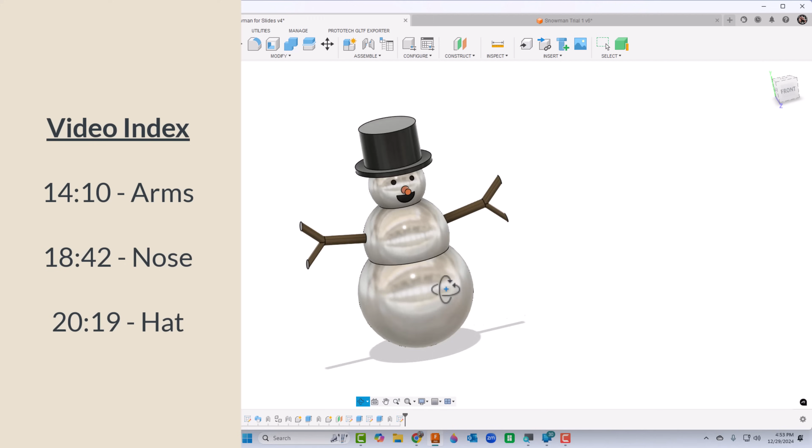In today's video, we're going to take a look at how to make this wintry festive snowman. Let's go ahead and get started. So you'll want to go ahead and create just a new drawing, and you're going to start by doing good fundamentals, right? We're going to go ahead and save it. So we'll save it and we're going to call this thing Snowman.

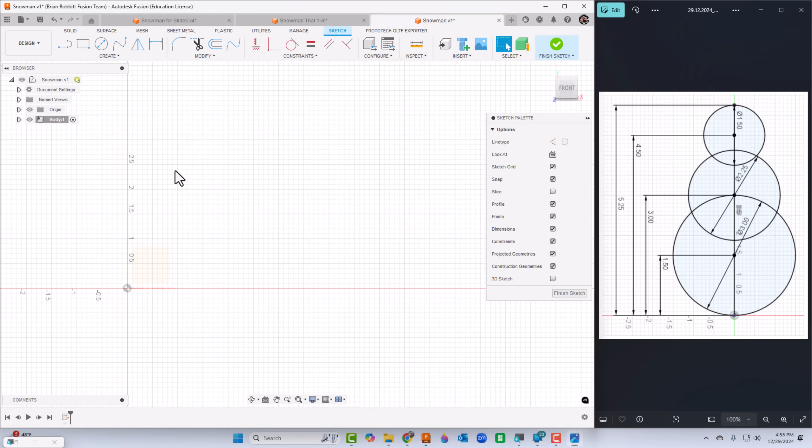We will go up here to New Component, and we're going to name this thing the body. So this is going to be the body of the snowman. And I'll sketch on this XY plane. That's where I always like to start. I'm going to start with that straight line. So I'm going to start on the origin and draw a line up. I'm going to make it 5.25 inches, something like that.

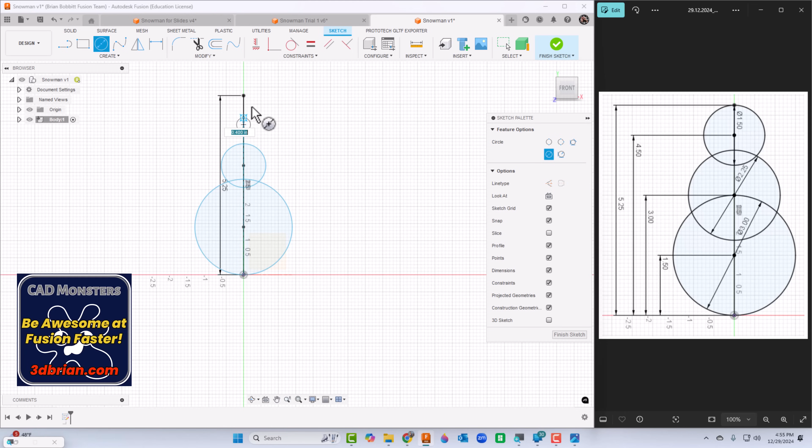Then I'm going to take my circle tool, and I can see I've got 3 circles here. So I'm just going to draw in some circles for now. I know that that one's going to eventually go through the origin. But really what I'm more focused on than anything are the points. So I'll go to dimension now. I'm going to say from the center of the big one to the origin, that should be 1.5. And the diameter is already 3. So we're already set there.

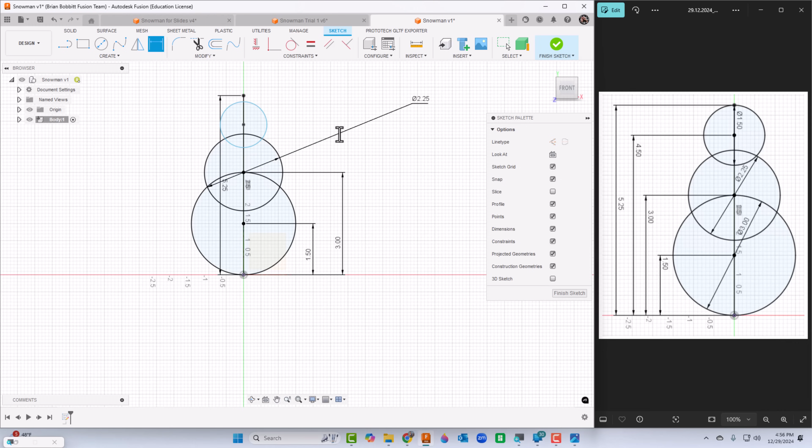Let's go ahead and take a look up here. I'm going to go from the center point of the second circle over, and that needs to be 3 inches. The diameter of that should be 2.25. And then finally, I'm going to do this last circle from center point down to origin. That should be a distance of 4.5. And the diameter of that, we need it to be 1.5. So I've got the basic sketch here. That's how I'm going to start.

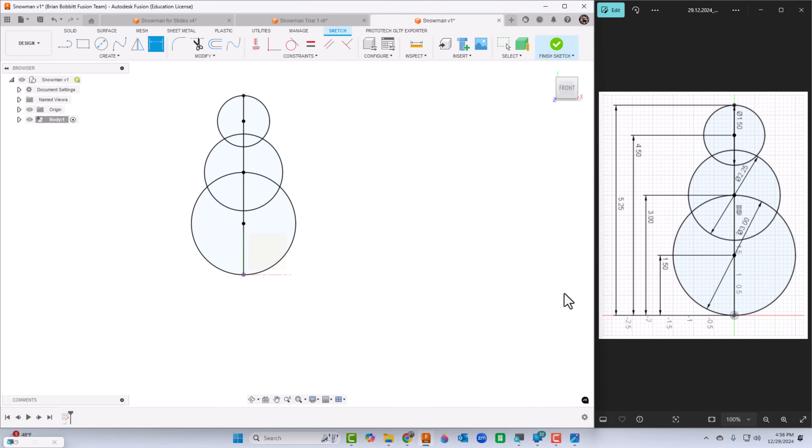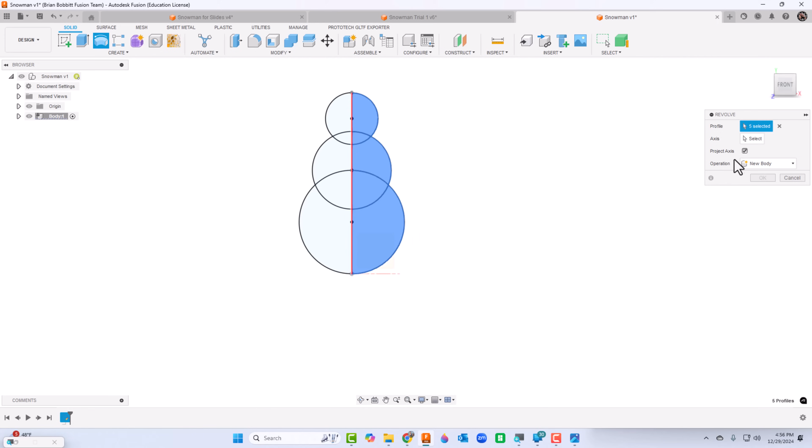I'll finish that sketch. And what I'm going to do is go to revolve now. If you don't see revolve there, you can go to create and say revolve. I'm going to click all of one side here. So all these little parts I'm going to click. And for axis, I'll click select over here. And then let's click the straight up and down line. When I do that, I'll go ahead and click OK. And that is going to create the body of our snowman. After that, I probably just want to go ahead and click the home button, and that'll center everything back up for us.

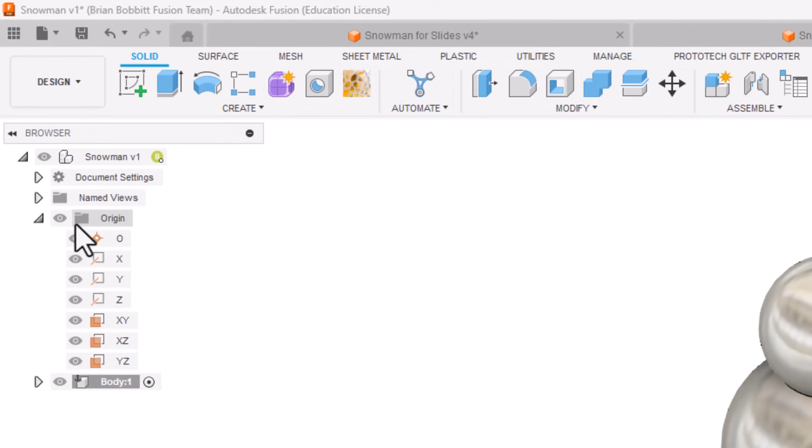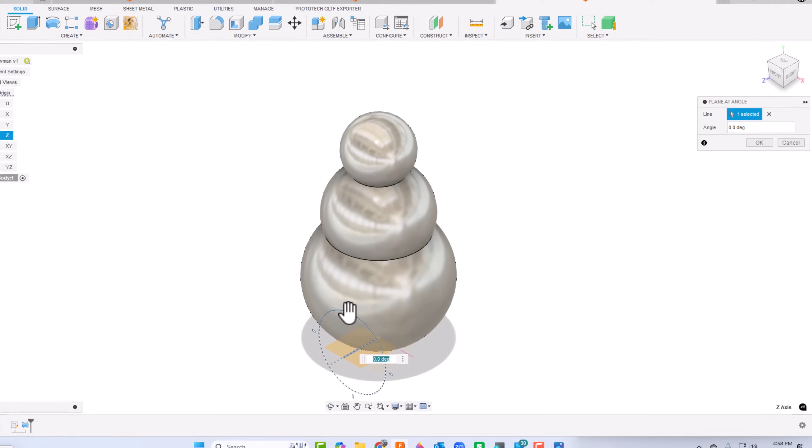So next up, what I'd like to do is create the armholes for the snowman. So I want to make sure that the origin is turned on, and it is. Make sure that that's on and ready to go. I'm going to go to construct now up here, and I'm going to say plane at an angle, because I want those arms to come out at an angle. So for line, it says select, and this is why it was really important to turn the origin on. I'm actually going to just select the Z line, this blue one down here. I'm going to change my degrees here to -80, and I'll click OK.

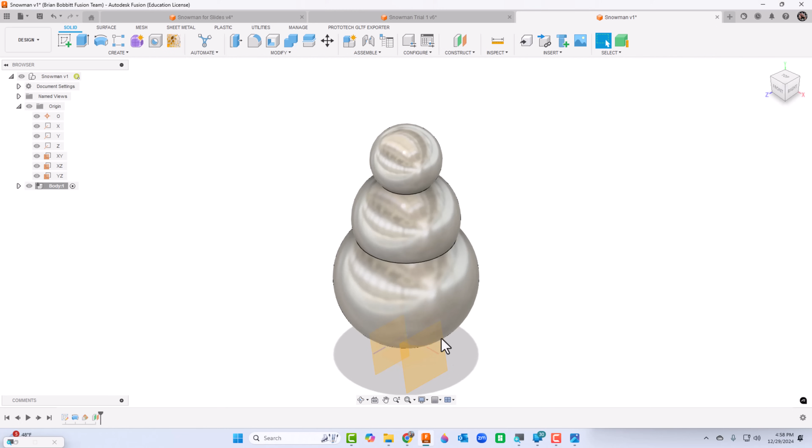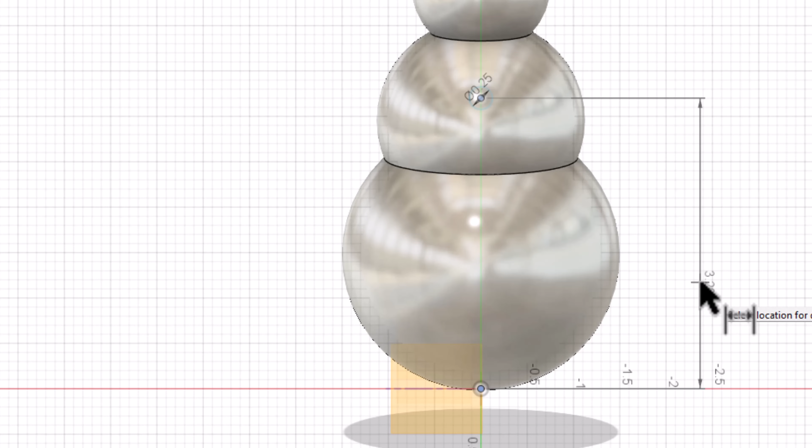What I want to do now, though, is offset a plane from this one. So I'll go up here to construct and choose offset plane and click the plane I just drew and drag out, and make that 1 inch. So now I'm going to click sketch and go to this plane. I know that this hole is going to be in this area somewhere, so I'm going to draw a circle. This circle needs to be a 0.25 inch diameter. I'll also click the center point of the circle and the origin, and let's make that a distance of 3. And just to be super thorough, let's use the horizontal vertical constraint here and click center to origin. Now that thing's not going to move.

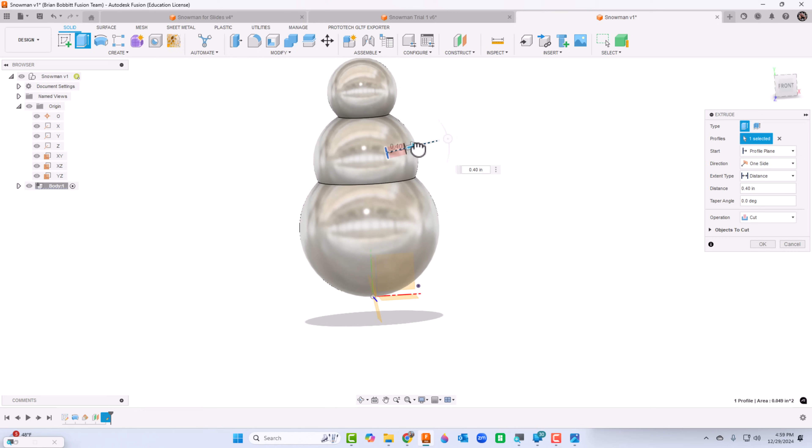I'm going to press E for extrude and rotate it in such a way that you can see what I'm about to do. I'm going to extrude this just enough to get out of the body. So 0.4 inch should be fine. Okay, so now I've got a hole there for the arm. Rather than draw another one, I think we'll just mirror that. We want to make sure we have that plane right here in the middle of the body. So let's go up here to create, and I'm going to choose mirror.

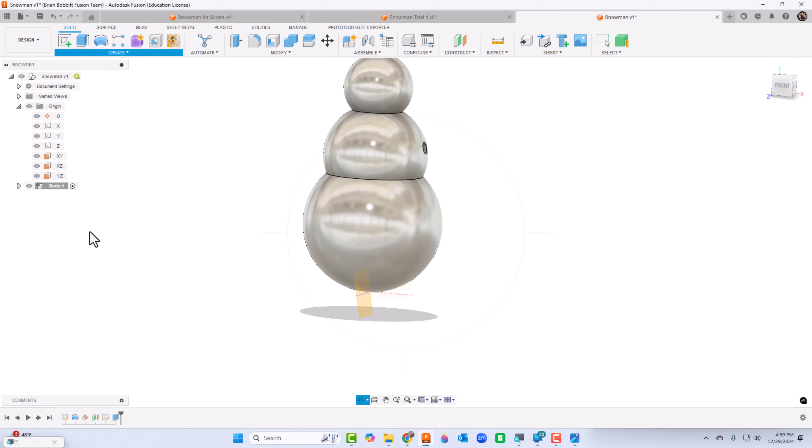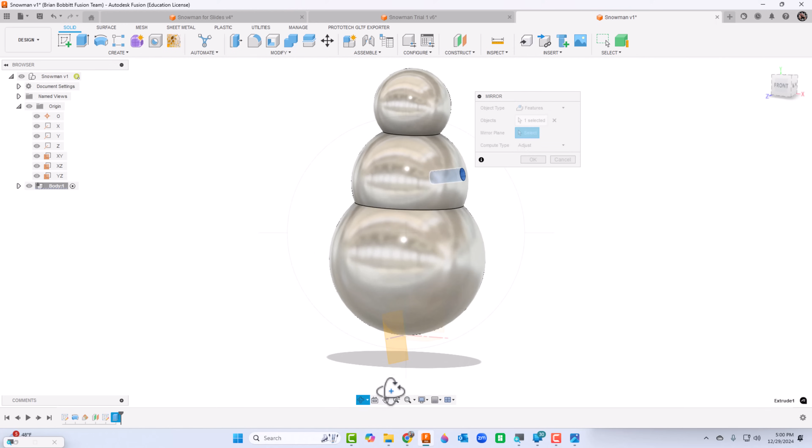Let's see, well, what do you want to mirror? Well, for right now, the object type says bodies. I need to make that say features, because that hole we just created is a feature. And I'm going to kind of just move in there and click the inside of it. Now for mirror plane, what we want is a plane that bisects all of that, don't we? So we need to make sure that we can see that.

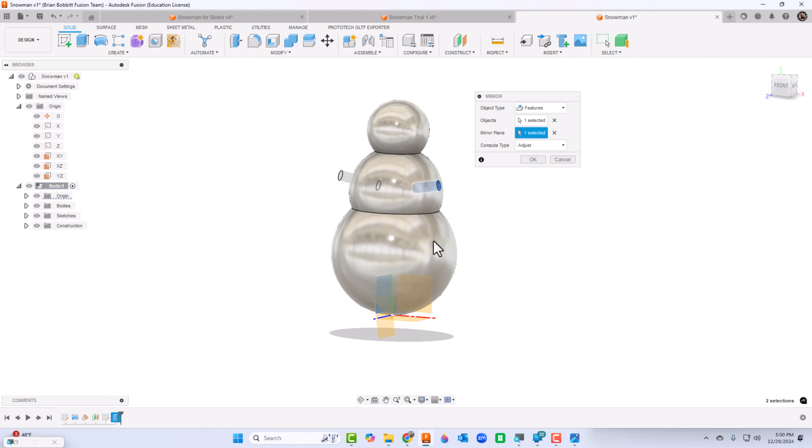So I'm going to go in here and kind of expand the body. And see how origin got turned off on us? Let's just turn that back on. Now there's a plane right there I can pick that'll bisect it. So there I can say, all right, I've got the object, which is the feature here, and a mirror plane I had to turn back on. Remember, it was right here. And then I just clicked it. I'll say okay. So now we've got the armholes. We're in pretty good shape.

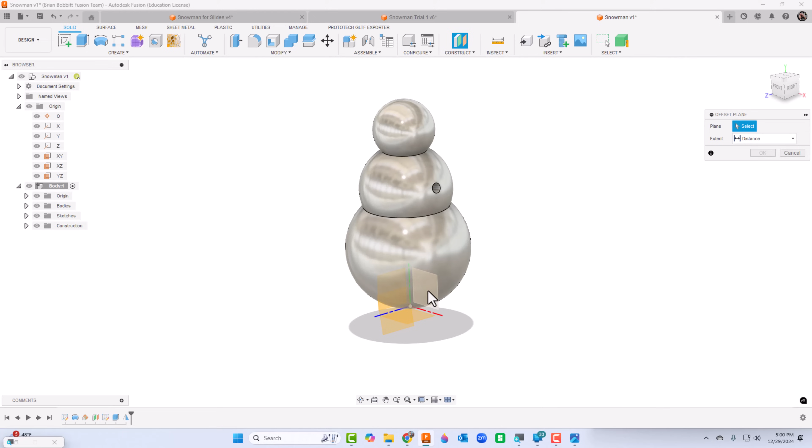So let's take a look and say, all right, well, let's make the hole for the nose. So what I'm going to do is create another plane here. So I'm going to go to construct and I'm going to say offset plane. And this is the XY plane. So I'm going to scoot that out. And I think I'm going to make that 1.25 inches. So I'm going to offset at 1.25. I'm going to sketch and I'm going to click that plane.

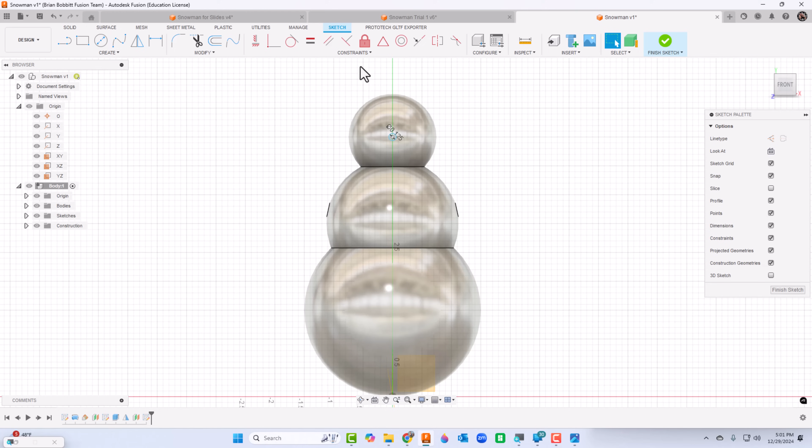So now I know that the hole of the nose is going to be in the middle of this top one somewhere. We're going to draw a circle there. We're going to make that circle be 0.125 inches. I'm also going to dimension it. So I'll say from the center of the circle down to the origin here, that needs to be a distance of 4.5. And while I'm on it, just to be thorough, let's use the horizontal vertical constraints. All right, center point of the circle and the origin. Notice how it turned black. That means it's fully constrained.

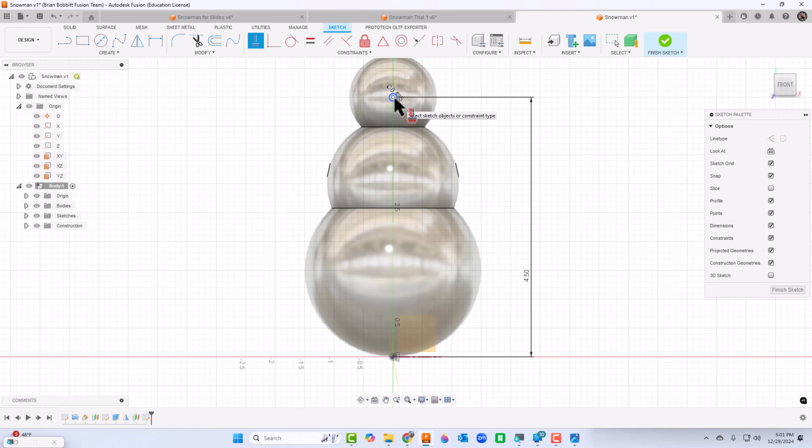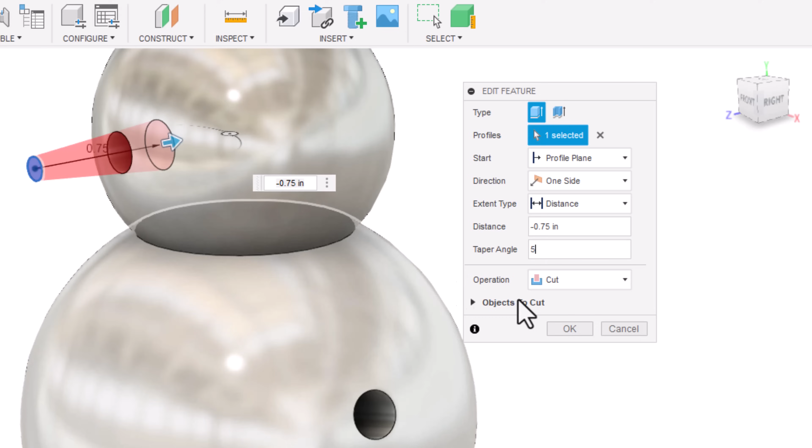From there, I'm going to press E for extrude. And you know, this is way out here. I'm going to drag the arrow this way, and I'm going to just change my number. It should be negative 0.75. Let's go here to this taper angle, because this is going to be a carrot. So our taper angle, we need to change it to 5. So you can see what it does there. It's got us a little bit of a taper coming out of there, which is perfect. We're going to click OK. So now we've got a hole for the nose.

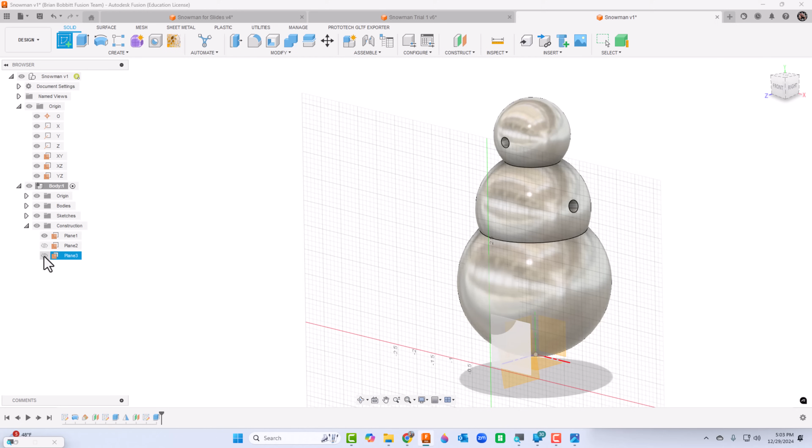And last, let's create the face. I'm going to go to sketch again. I want to click that one plane that we just projected out there, but you see how it disappeared on me again. So I got to make sure, like I go here to construction and see, you know what, that plane disappeared on me. Here's plane 3. That's the one we just created. So I got it back up there. I turned the visibility back on. Now I'm going to click sketch and go on that. So next up, we're going to do the face. Let me go ahead and get us a side-by-side real quick.

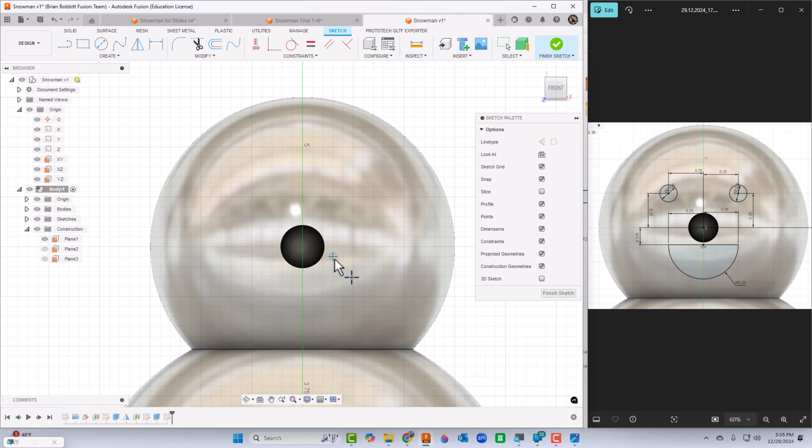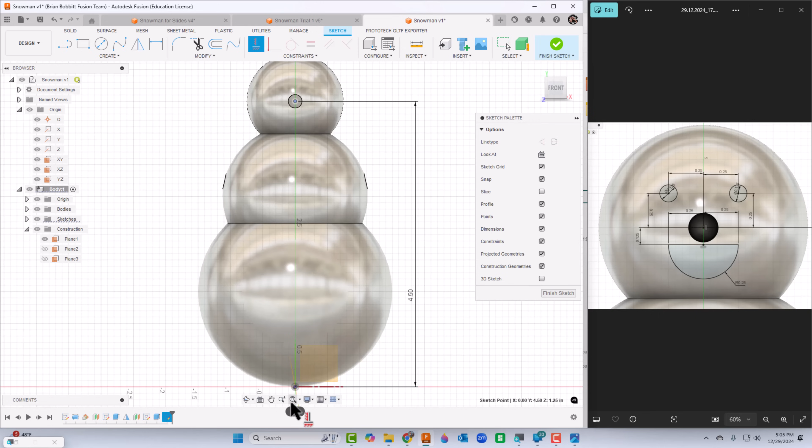All right, so we have a series of circles here, but I'm going to create a point just to have some extra geometry to help me out here. So I'm going to go to create. I'm going to say point. And I know that I want the point kind of right here in the middle of this thing, so I'm just going to click right here, which you would think would be enough. But let's check it, just to confirm that we're in a good place here. So distance from center point of that to the origin, that should be 4.5. And it is. And also I'm going to use the horizontal vertical. So I'm going to say center point to origin again. That way it lines them up perfectly.

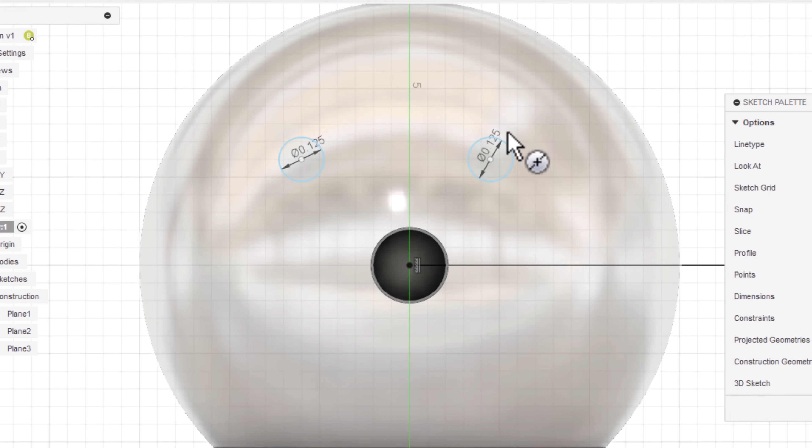Now I'll go back in here and zoom in on the face part. So I know I've got a circle here. I'll go ahead and dimension that. That's 0.125. Press C on the keyboard. That'll get me a shortcut to circle. I'll draw another circle over here. I know that's 0.125. And here for a little bit, we're going to use 0.25. So I'm going to say center of the eye to the created point should be 0.25. Center of the eye to the point we made, we want to go up 0.25 as well. And we're going to repeat that process over here. 0.25. And come down from here.

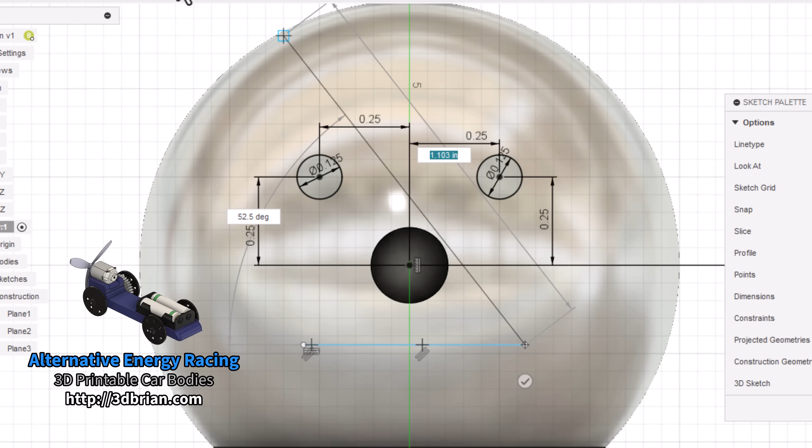0.25. All right, so the eyes are in good shape. Let's go ahead and do the mouth while we're at it. So we can take the line tool, and I'm just going to draw a line below there. I am not going to dimension the length, but I will dimension, say, from the center to the line. This should be a distance of 0.125.

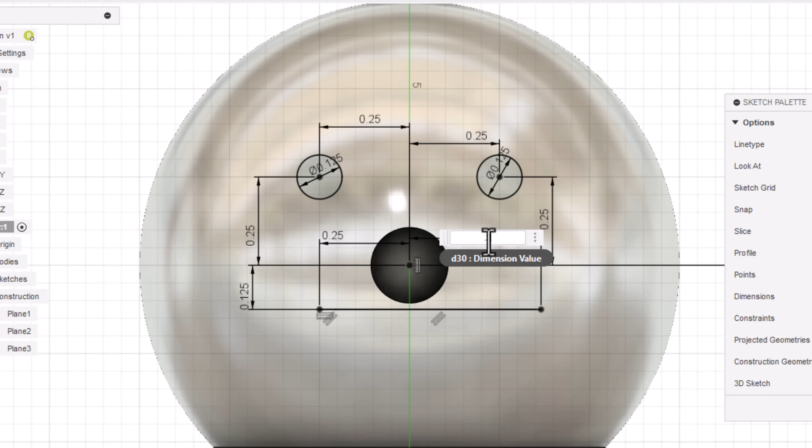And then we also want to say from the center point to the end of the line, that should also be, let's make that 0.25. Let's do the same thing over here to this side. And now we'll go up to create, and we're going to choose arc. I'm going to use a 3-point arc here. So create, arc, 3-point arc.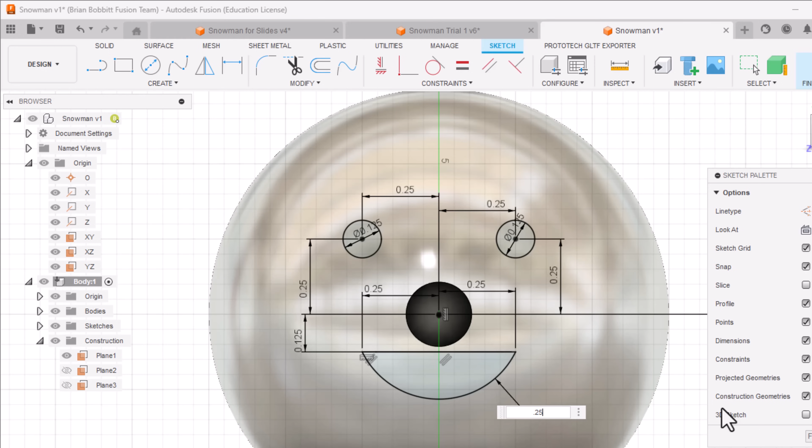1 point is on one end of the line. The second point is on the other end. And the third point for now we'll just place. We'll dimension that here in just a second. So press D for dimension. Now I'm going to dimension this. This should be 0.25. Okay, so there is our face.

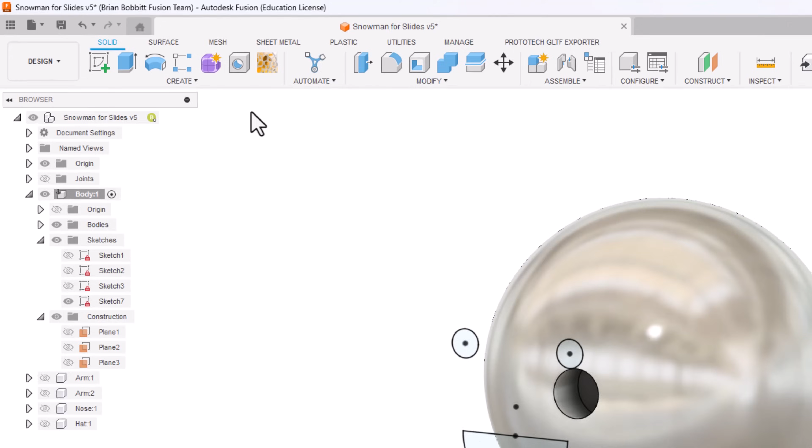So what we're going to do now is we're going to rotate this in such a way that we can see, all right, we are way out here with the face, right? Well, we need to put that on the actual sphere. So here's how that works. We'll go ahead and click Finish Sketch. And now we're going to go to the Create menu, and we're going to choose Emboss. So there's Emboss.

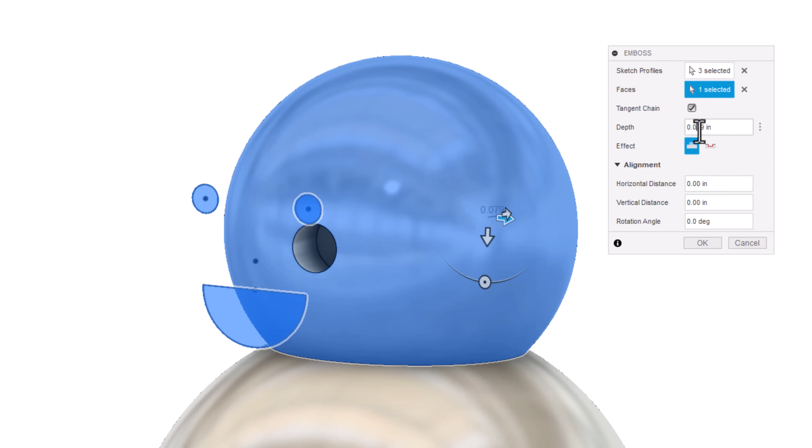In a perfect world, what we'd like to do for sketch profiles here is we'd like to click all three shapes that we drew, so both eyes and the mouth. And then we would click Faces, and we would click the sphere. Now we do want to make one change here. This says 0.079. I really like the 0.016. And I also prefer, instead of doing an emboss here, I would do a deboss. So it actually cuts them in a little bit.

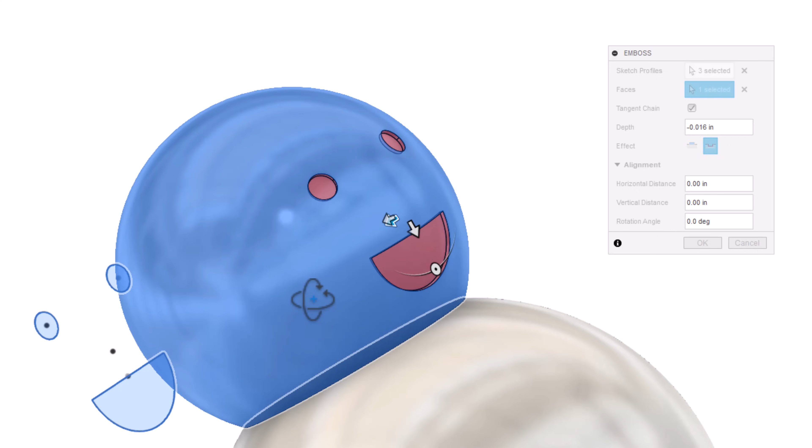But I want to show you what's happened here. These are not showing up on the side that I want them to show up on. They're actually on the back. So if I rotate this around, you can see it came up back here, which you would think, well, that's not a big problem. But it is, because the nose is right there. That's the nose hole. So here's a workaround. If this works for you, you're good to move on. But if it gives you a little trouble, here's a workaround to this.

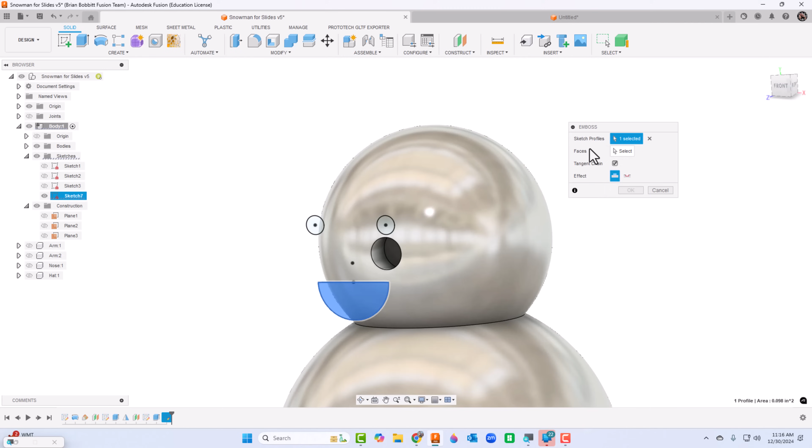I'm going to cancel that. And I'll go up here and I'll say Create. And I'll still say Emboss. And I want to do just one sketch at a time. So I'm going to do the mouth. So I've selected it. Then I'll select Face. And I'll click the sphere. And there it is. I can go ahead and do the deboss. Now remember, my depth, you can make that whatever you want. But I prefer the 0.016. So I'll click OK there.

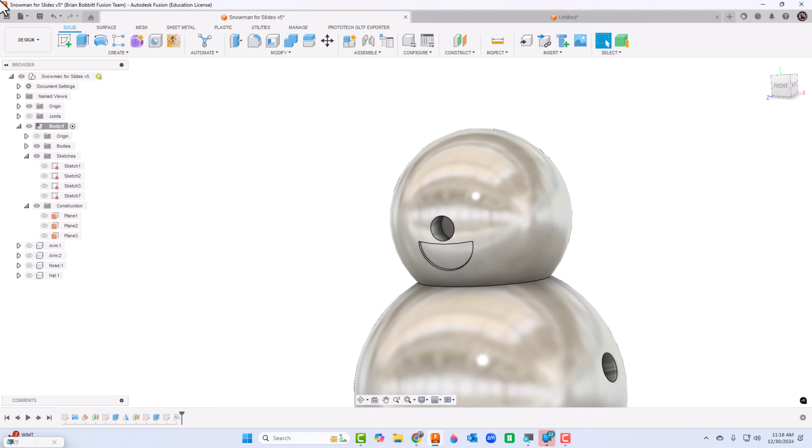So now you're thinking, well, all right, I've got a mouth, but where's the eyes? So here's what we'll do. We need to get that sketch back up. So if we look under the body component, that should be the last sketch we put in. For me, it's sketch 7. For you, it's probably sketch 4. So I'll click that eyeball, and there's the rest of the sketch. It's back up now. So I'm going to repeat that.

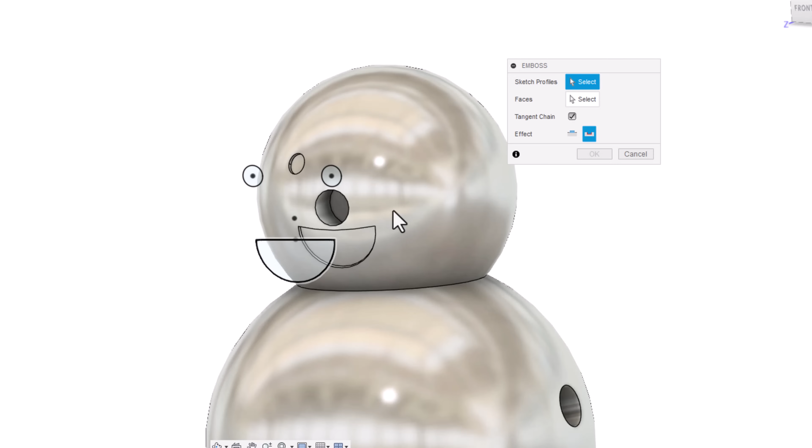I'll say Create, and I'll say Emboss. I'm going to click this eye and select the face and do it over here. Notice the numbers are already good again. Okay. And I'll do it one more time. Notice I didn't have to pull the sketch up this time because we've already turned the visibility on. So Create, Emboss, and we'll take this last eye and then click the face. And there it is. So now I'm done with that sketch.

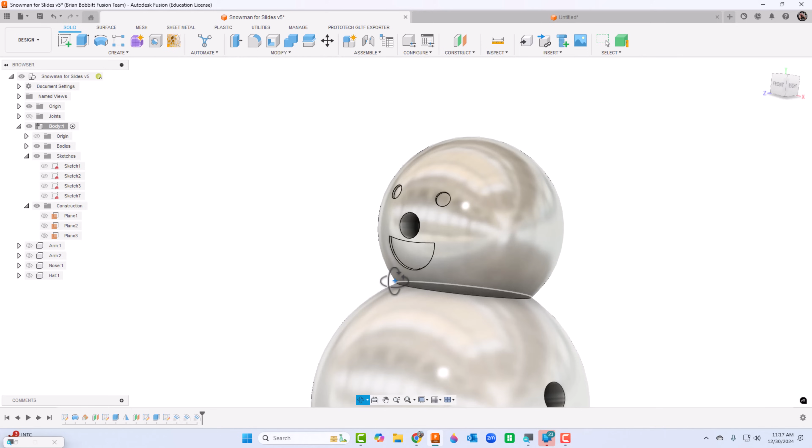So I go back over here now to the sketches in the body component, and I'll just turn the visibility off. All right, now before we leave this though, we should go ahead and color in those eyes and the mouth. So I'm going to press A for appearance, and that'll pull up the appearance toolbar. And what I'd like to do is just make those black. So I'm going to go to Fusion Appearances. And I'm going to scroll down to Paint here. There's Paint. I like the glossy.

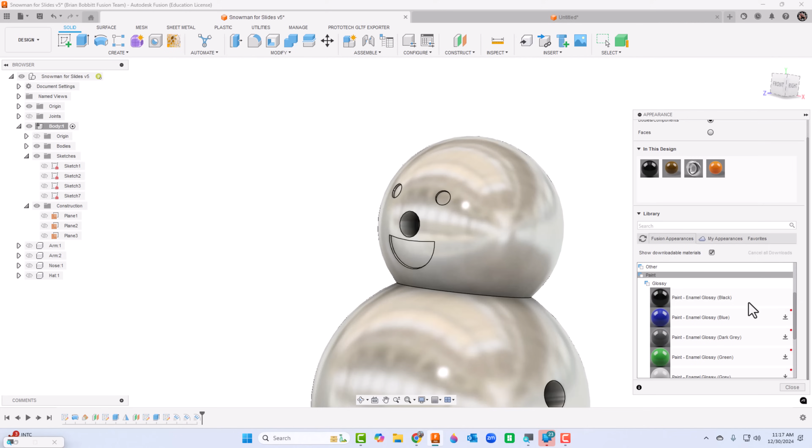Now, I've already downloaded this, but you see how there's download buttons here? If for some reason you haven't used any of these colors yet, you may have to download them first. It doesn't take very long at all. You can just click the download, then you're free to drag it.

Before I do that, right now it says Apply to Bodies and Components. If I do it right now and drag this black over, it's going to make the entire snowman black. I just want the eyes and the mouth.

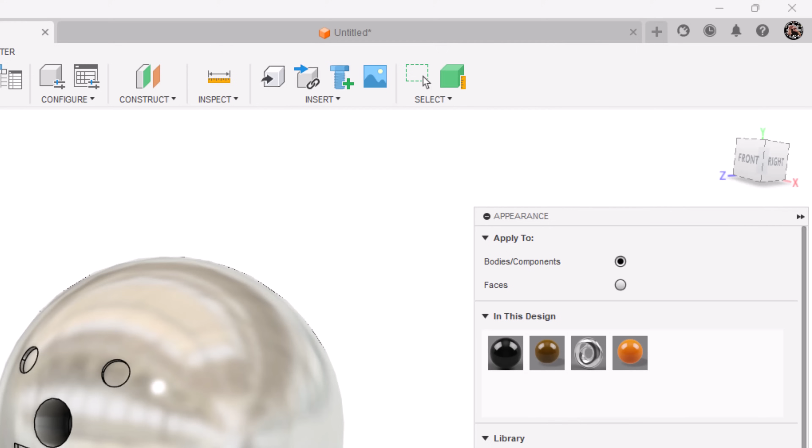So what I'm going to do is click Faces. I've clicked Faces, and now I'm going to bring the color over. I might have to rotate that a little cleaner to see that one. There we go. Remember, rotate and zoom are your friends here. You really want to make use of those.

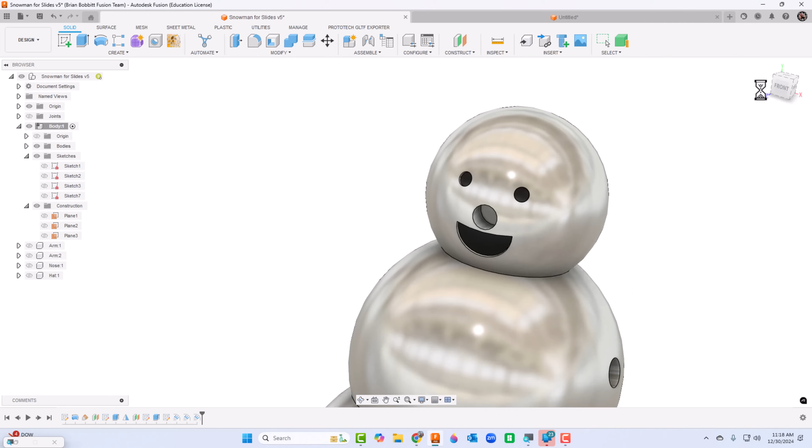All right, so I've got that body taken care of. Before I exit though, I'm going to click the home button just to square us back up.

Next up on the agenda is the arms. So to do the arm, let's go ahead and activate the entire assembly, the top level assembly right up here at the top.

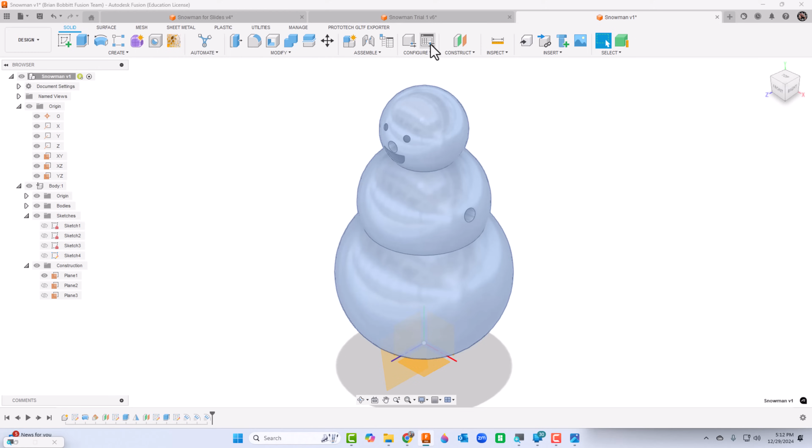I'm going to say New Component again. This time I'm going to name it Arm. Press OK. I want to rotate this so I can see down in there, this hole right here where the arm's actually going to attach.

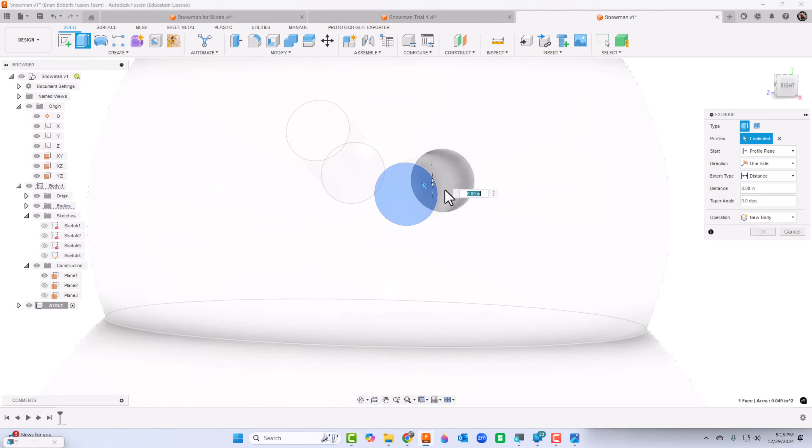So there it is. And I'm going to go and press Extrude. I'll click right there, and I'm going to extrude this thing out 2 inches. Let's go ahead and rotate this around so we can see what we just did. There it is, that's pretty good. And we'll go ahead and click OK.

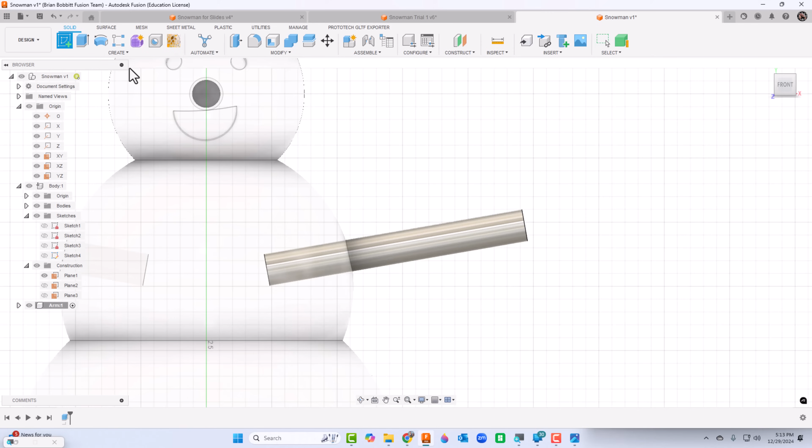I'm going to choose front on the view cube just to kind of square things up for us. Now from here, I'm going to say sketch. Click right there on that front view.

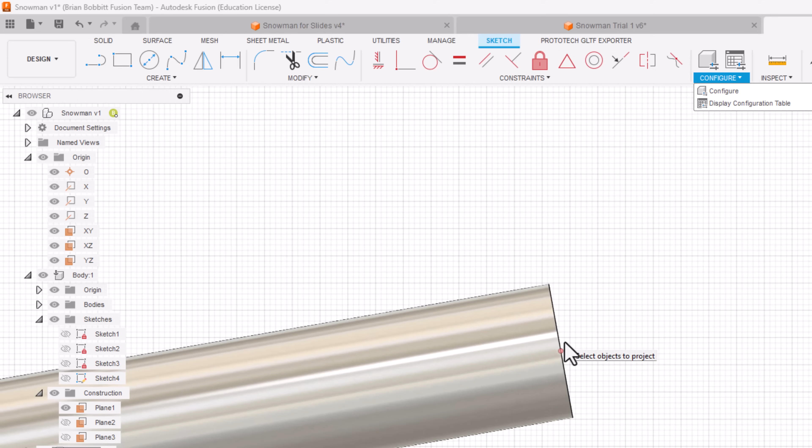I'm in good shape. So this is where things can get a little bit tricky, but not too bad. I want to press P for project, or I could also go up here to create and say project. What I'd like to do is get a point here that I can draw off of. So I'm just clicking the end of this arm, and there's that center point. I'm just going to project it.

I'm going to take a line, and I'm going to draw from that center point coming out. Now the length of that should be 0.75, and the angle should be 45 degrees. Zoom out so you can kind of see what we did there.

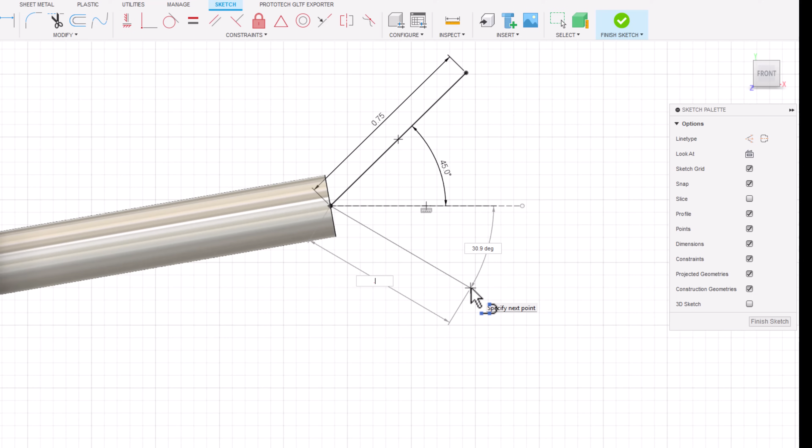Press enter. And take the line tool again, and I'm essentially going to create the exact same thing down here. So the length is 0.75, and then our degree should be 45 again.

Now before I want to move on, before I finish the sketch, I want to rotate it because I'm going to do a sweep here. I want to be able to see the end of that arm extrusion. So now I'll finish the sketch.

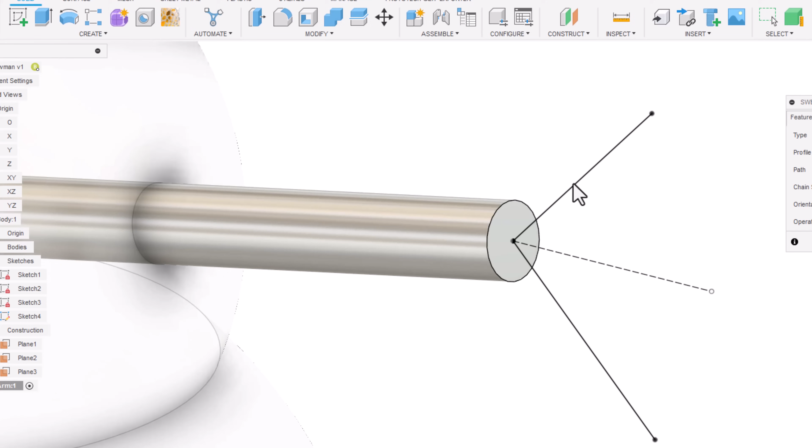I'm going to go to create, and I'm going to say sweep. For the profile, I want the end of the arm. And for path, I'll click select and click the line. Mine went into cut mode, but I'll go right here to cut, and I'll say join it. So there we go, click OK.

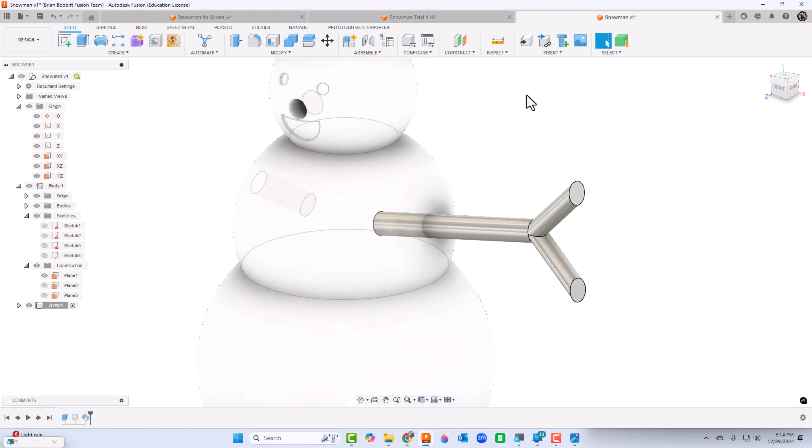Now before I move on, I want to go to A for appearance, and I'd like to make this a brown. And I don't have brown.

I have yellow, so I'm going to drag that over, but here's that download I was talking about. I'll download it real quick. It doesn't take long at all.

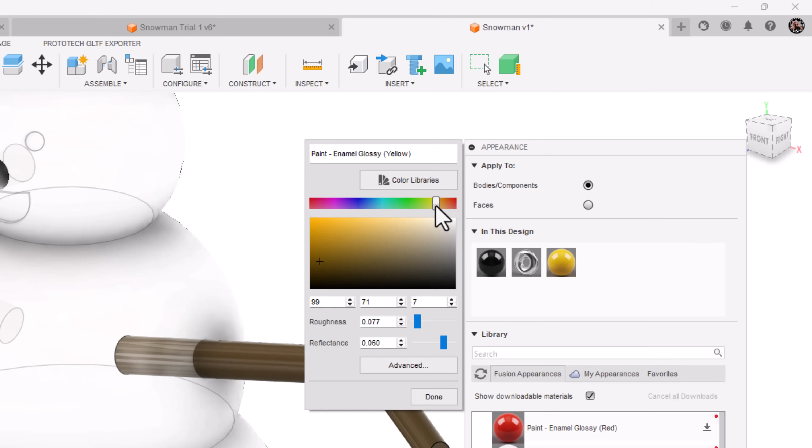I'm going to drag the yellow over. And then up here where it says 'in this design,' I can right click it and say edit. I can drag this little mouse pointer until I get that shade of brown I want. If I can't quite find it, I can also drag this slider up here. And I'll click done and close.

Right, so I've got that on there. Now what I'm going to do is activate the top level assembly. Now this right now will move. We don't want that. Let me undo that real quick.

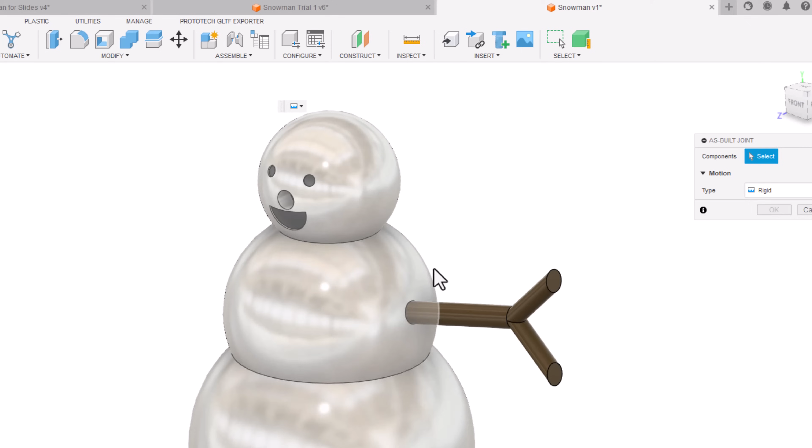What we'll do is we'll say assemble, and then we'll say as built joint. So I'll click that, and I'll say, all right, let's click the arm and then the snowman. It wouldn't matter if we went the other way.

Now we have already got that arm drawn, so let's duplicate it and put it on the other side. We'll go over here to the browser area on the left. I'll right click on arm, and I'm going to say copy. I want to right click out here in the drawing area somewhere and say paste. It placed it in there.

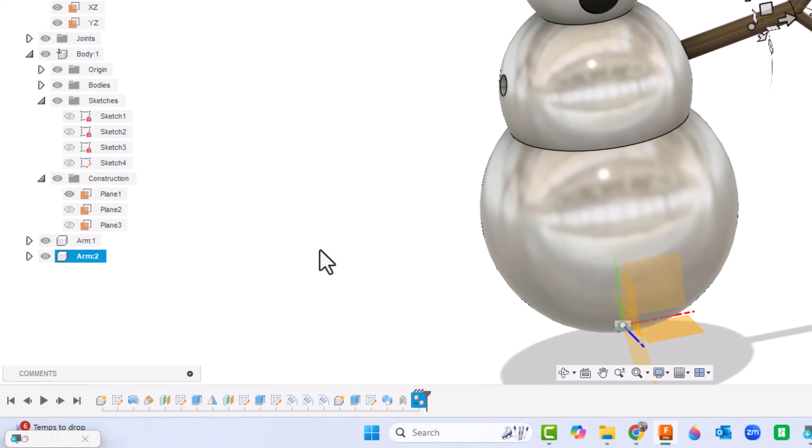I want to move this around so I can actually work with it. I just want to be able to click on that endpoint, so I've moved it into spot. Now I'll go up here to joint. Oh, give me the end of that. And I need to rotate the snowman so I can actually see in here. It does help to zoom and rotate.

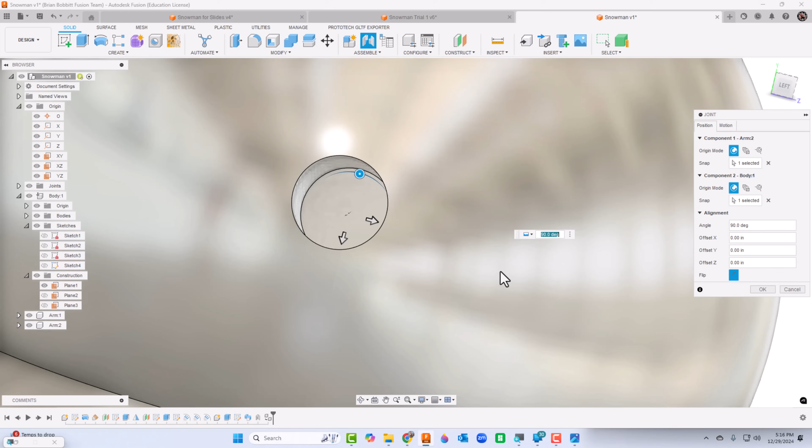Now, if that were to go in backwards, remember, you always have that flip button. You also have this rotate option. And then I'll click OK.

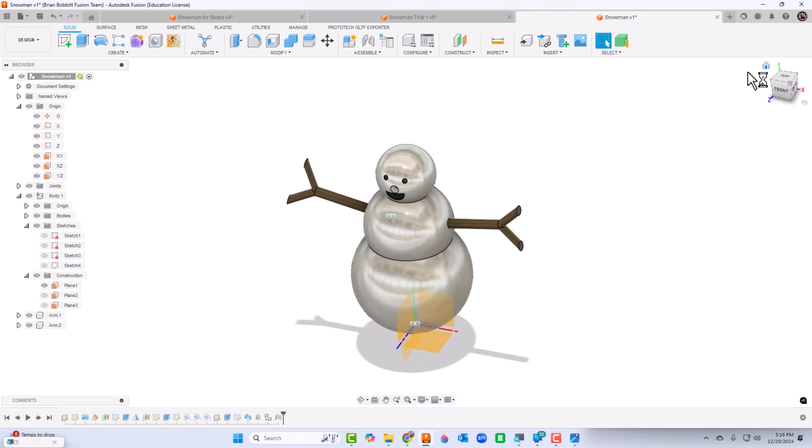There we go. Now, next up, we're going to take care of the nose. I'm already on the top level assembly, I'm in good shape there. I'm going to say new component, and this one I'll just call nose.

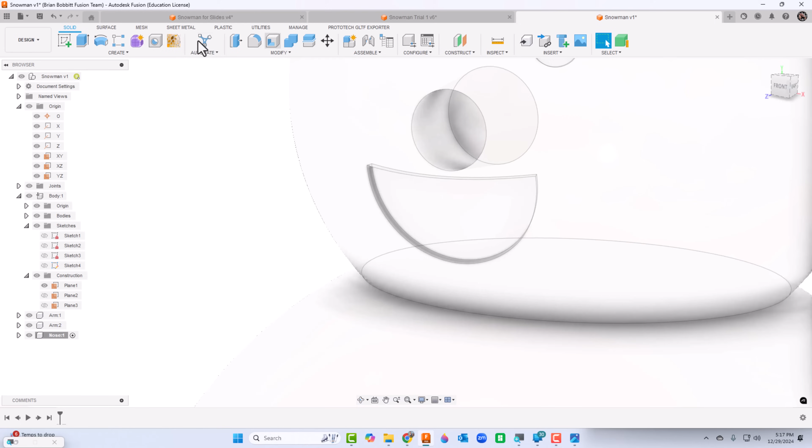It's very similar to before with the arms. I'm going to rotate it so I can see inside there. I'll choose extrude, click that and drag it out. This nose, we want it to come out to be 0.5 inches. Let me show you the right side view here so you can see where we're going. There it is, it's 0.5.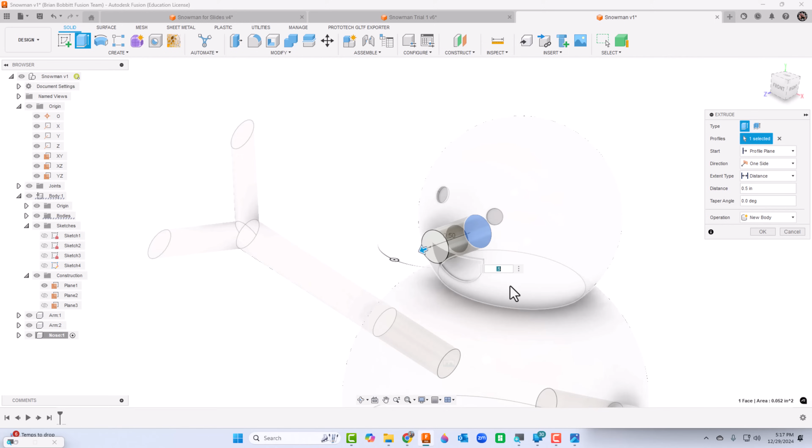Now the nose is not exactly what we were hoping for, but what we want to do is put that taper angle on there. Remember when we originally made this, we put a 5. So this is going to need to be -5. And it comes out perfectly. We'll go ahead and click OK.

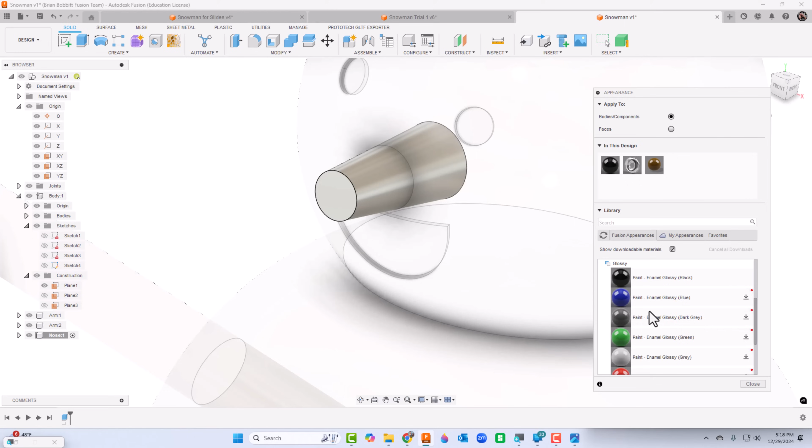And we'll press A for appearance, and I'm going to drag red over this time because I want it to be orange. So red, and then I'll right click on the red sphere, say edit, and find an orange. I'm sliding here, and I think we'll go up here. That looks good, we'll press done, and then we'll close that.

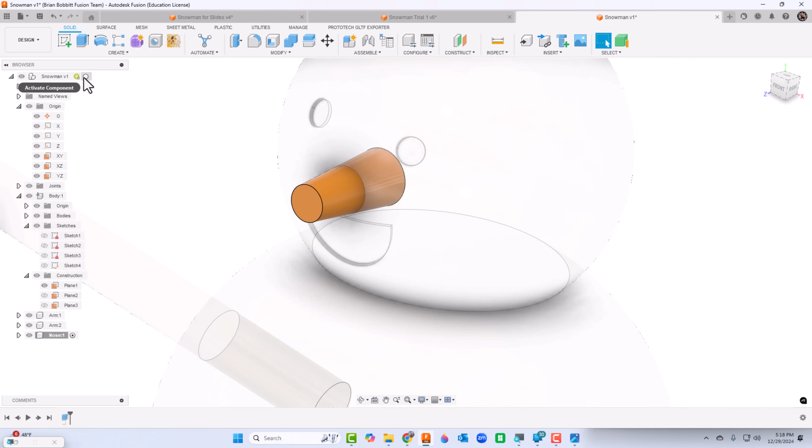We want to go ahead and activate the entire assembly. Now right now this nose moves, so I'm going to undo that. I'll go up to assemble and say as-built joint. Click the nose and then click the snowman. And he's good. Press that home button so we can see what's going on. Looking really good right now.

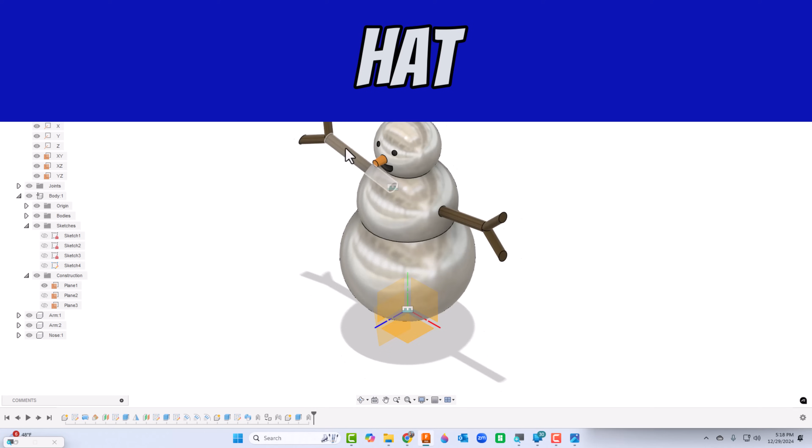Let's get that hat taken care of. So what we're going to do now, I'm going to go ahead - I have that top level assembly active. I'm going to press new component, then I say hat, and press OK.

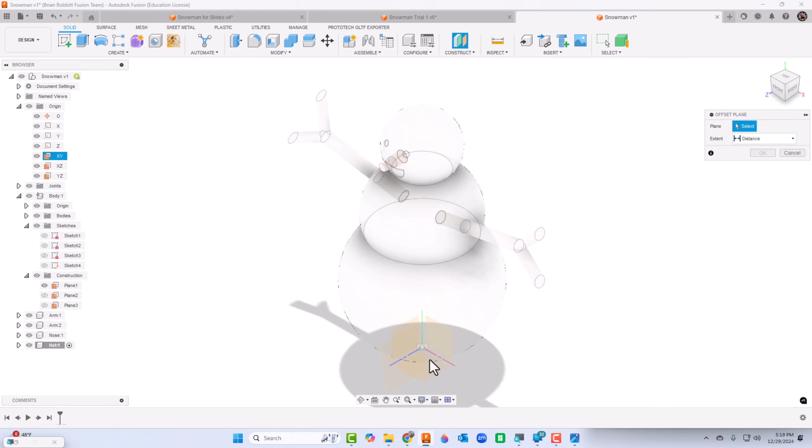I'm going to do an offset plane at this very bottom, so I'll say construct and say offset. I'll drag this up. This needs to be a distance of 5 inches. Press OK.

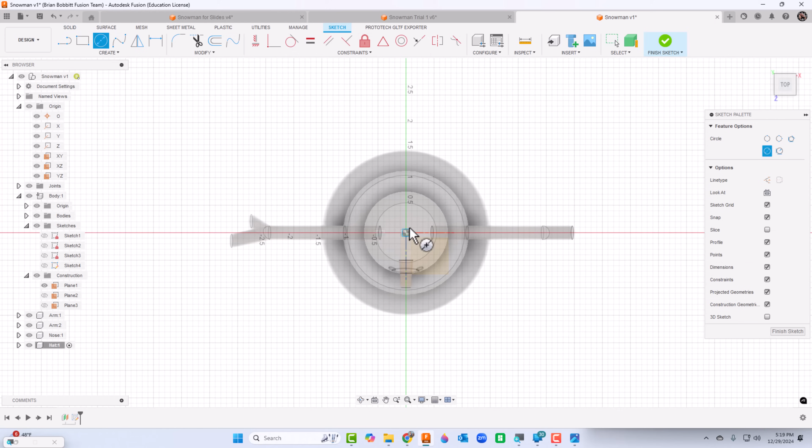So if I look at it from the front view, you can see it's going to come in right above his eyes. But what I'm going to do is actually draw it on the top. So sketch, then click that plane we just drew. I'm going to draw a circle from the origin and make that 1.5.

Then I'll use the offset - I'll use that offset real quick, and let's offset it 0.25. So I'll extrude this little ring I just made, about 0.125 inches.

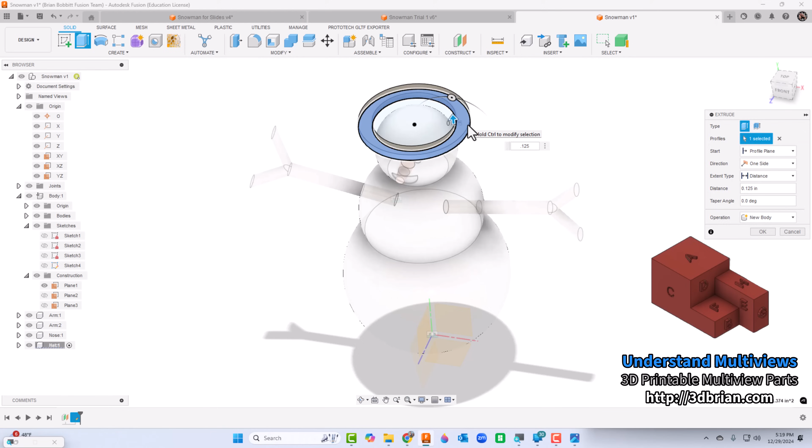Then I'll come back into sketch. I'm going to draw another circle - or I could press P and project this inside circle, either way I'll get the same result. So extrude, and we'll just drag this up now. I usually make this thing 1 inch.

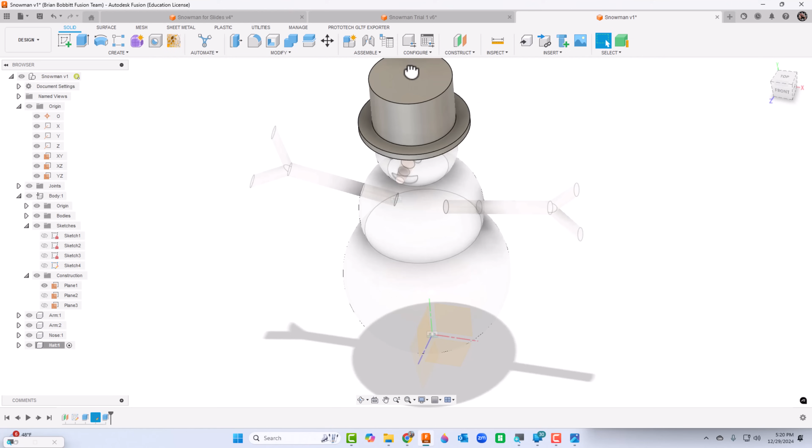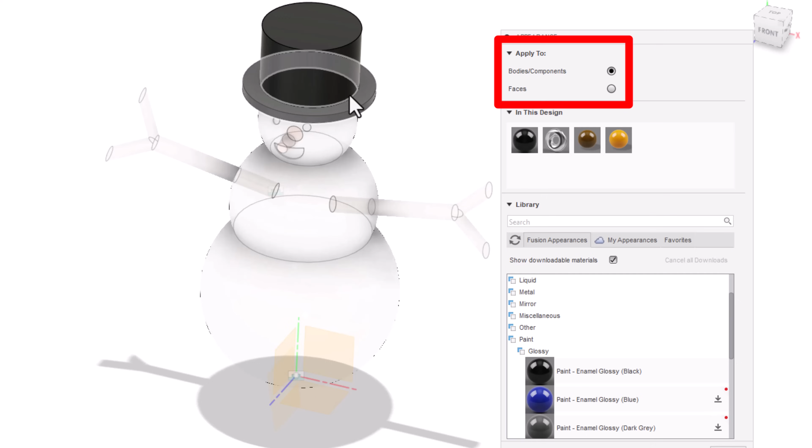All right, so I've got his hat on. While we're here, let's go ahead and press A for appearance, and there's black - I'll just drag it over the whole thing. Now notice that one didn't do it perfectly, so I'm going to drag the black over to the rim of the hat as well because it considered them 2 separate bodies. And we'll press close.

We'll go ahead and activate the entire assembly again. Now we're not quite done, right, because his hat still moves. So I'll undo that. I want to say assemble, an as-built joint, click the hat and click the snowman. And you're good to go. Go ahead and press home.

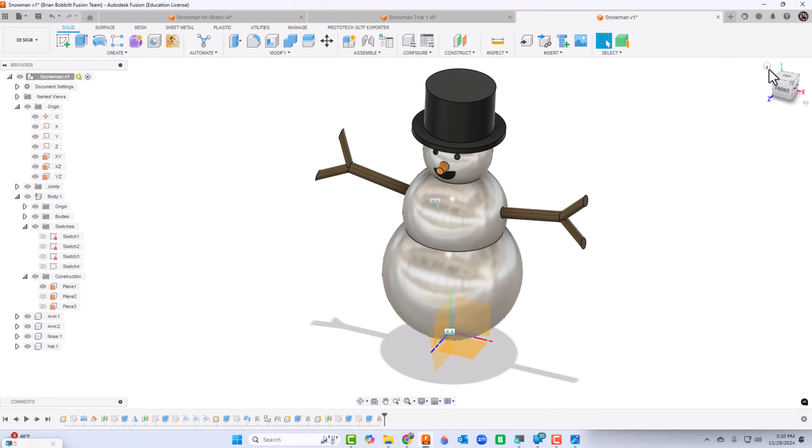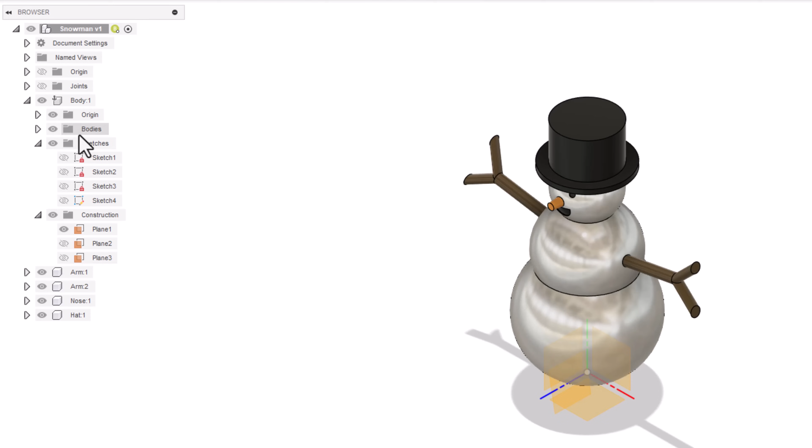Just to clean it up, you might want to turn the origin visibility off. I like to turn the joints off as well. And then any other origins that we have on there, we could turn those off, and especially any construction planes we have, which are going to be a lot on the body of it. So any of that extra stuff, we can just turn the visibility off. And then from here, we've got our snowman. So congratulations.